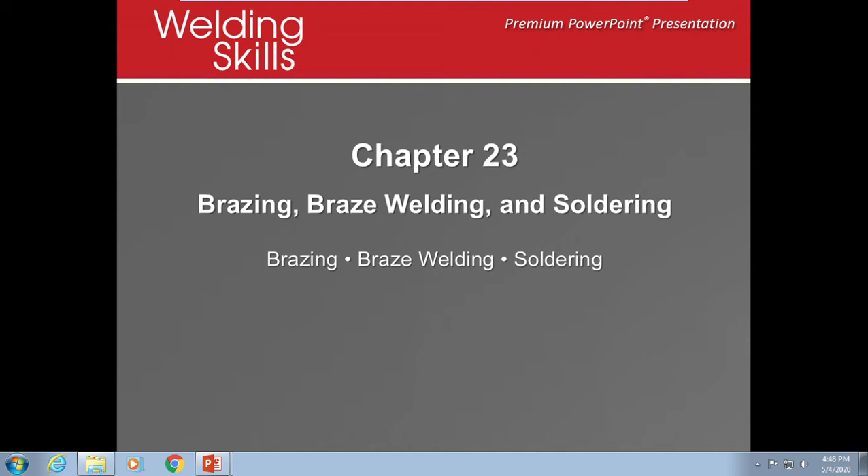When we talk about brazing, we're really talking about joining two pieces of material. But instead of melting the actual base material, we're only going to melt the filler material. Usually brazing is above 840 degrees.

The most common joints we use are a lap joint and a butt joint. The lap joint is actually a lot stronger because there's a lot more surface for it to connect. With a butt joint, whether scarfed or flat butt to butt, there's not a lot for it to stick to, so we tend to stay away from butt joints if we can. We want as much adhesion as possible.

Brazing also allows us to use dissimilar materials. It's like the glue between two pieces of paper or two pieces of wood. We're not changing anything about the material itself, only changing the filler metal.

For a good brazed joint, we need a fairly tight clearance — usually the most effective is 0.001 to 0.010, meaning it needs to be nice and tight. We don't want it overly tight, but we want to clamp it down to make sure that it works.

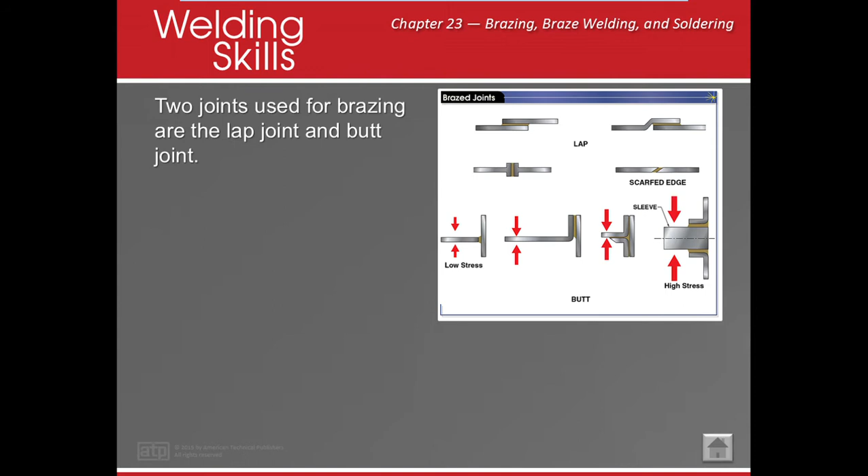For example, if I got a piece of material off the saw and it has water that sticks it together, it makes it very difficult for it to come apart. That's capillary action and surface tension working together. Now we're using that with a material that gets hot, so it spreads everywhere and sticks to each other.

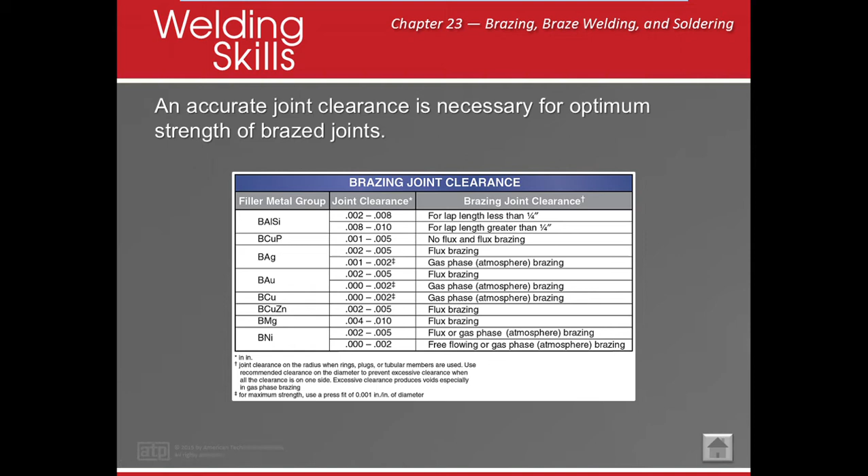Now the other thing we need is flux. Flux helps things stick together. What flux does is it kind of cleans the material to a certain effect. It's not going to get off any grease, dirt, or grime, but it's actually taking out what are called oxides and anything that could affect it.

It's also corrosive, so it gives a little bit of tooth for everything to stick on a little better. We have different types of fluxes used for different filler metals and particular base metals, so they have to match what we're trying to do.

Flux can come in many different forms — powders, pastes, liquids, or already applied onto our rods, which is how we usually do it. If we use a powder, we'll get the rod hot and dip it into the powder so it sticks on, ready for us to go. Pastes and liquid work in that same way.

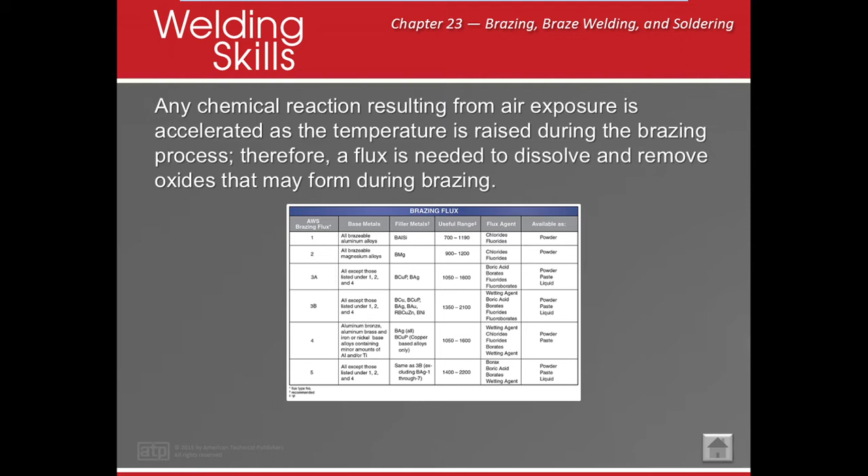So here it is, to apply a powder flux. We're going to heat it up and dip it in there.

AWS classifies materials by the B for brazing: aluminum, silicon, copper, phosphorus, silver, different precious metals — that's gold — copper, copper-zinc, nickel, magnesium. So these are all of the things.

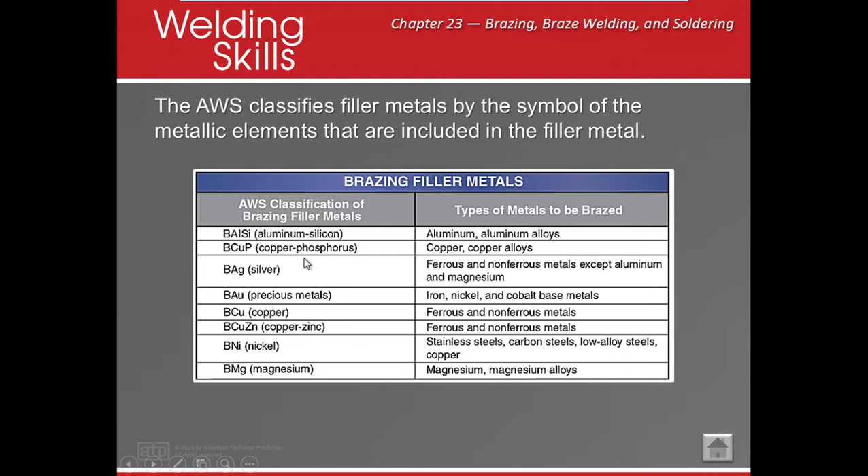Here's my brazing metal, and we want to match our filler metal with our base material, making sure we use the same type of thing.

Now, when we use the heat, we need to pay attention to how we use it. Normally, when we use a gas torch — that's usually how we braze — we're going to use an oxyacetylene welding torch, or there are many different types.

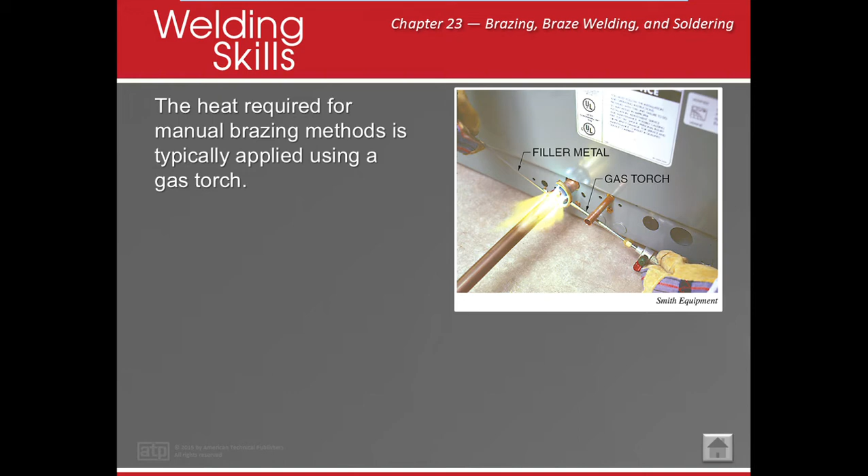We can do MAP gas or butane, but whenever we're doing that, we don't need to use the inner cone. When we braze, we're actually going to use the outer envelope, which means it's not going to get as hot, and we're not going to melt our base material — we only want to get it hot enough to melt our filler material. So here it is, the outer envelope, the outside of it. We don't want to hit the inside when we're doing that.

All right, now let's talk about different types of brazing. This gets a little crazy, but let's talk about it.

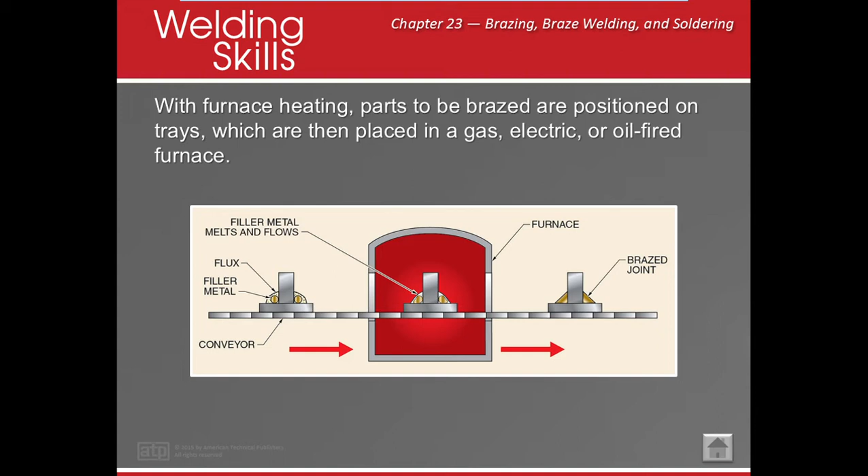So this is for production work. What they're going to do is put the assembly together, put flux on it, lay the filler metal down, clamp it all down, and then put it through a furnace. The furnace is going to melt the filler metal and melt the flux, and it's going to flow to where it needs to go. Then as the conveyor belt goes through, it starts to cool it off and solidifies into a brazed joint.

Now this one's called induction brazing. What happens is we have either an electrical coil or a water and oil coil that goes around this area to warm it up. Here they're going to put the workpiece near it so it gets warm. The only problem with this is that the heat isn't going to be the same all the way around, so we can have a little bit of an issue with some pieces not being melted fully. That's the only thing with an induction coil. A lot of induction coils are actually used to preheat piping and things like that.

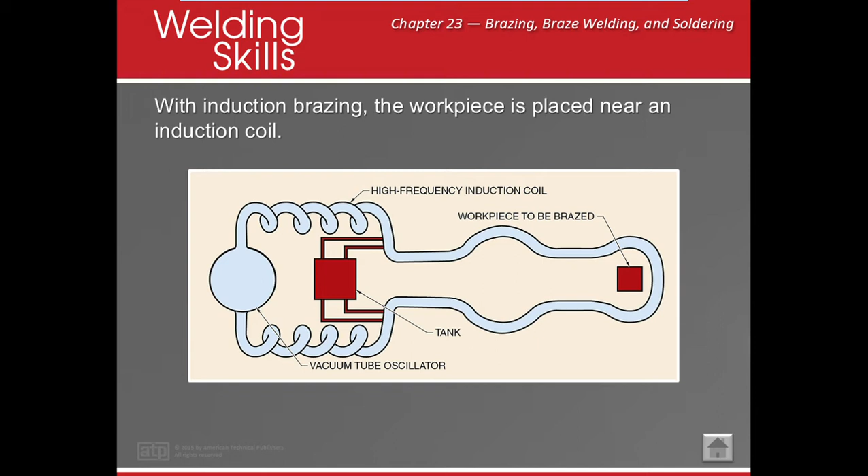All right, resistance brazing. Well, we talked about spot welding, where we take two pieces of copper and put the electricity through it. But this is different. We're going to put the electricity through it, but we're not putting enough current through here to melt our base metal. So here's our base metal, we're not going to melt that. We're only putting enough current to melt the filler metal. Now if we're doing resistance brazing, we know brazing is what? Over 840 degrees. So approximately we need a few amps here and there to make sure we don't go over that and melt our base metal.

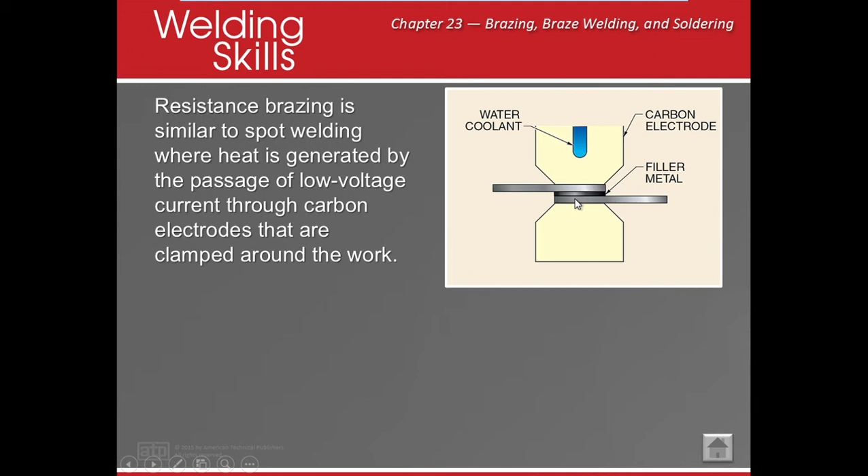All right, dip brazing. I think this is the coolest step ever. There are different ways they can do it. They get these little assemblies together, stick everything together, and then dip it into pretty much the braze material, and it's only going to stick to the areas that have been fluxed. The other way is they do a dip 1 and a dip 2, kind of like when they chrome parts - they stick it into a material where it sticks to it, and then the other one is where everything's going to stick to. Usually this is for smaller parts - they do this for electrical boards and things like that when they can do it very quickly.

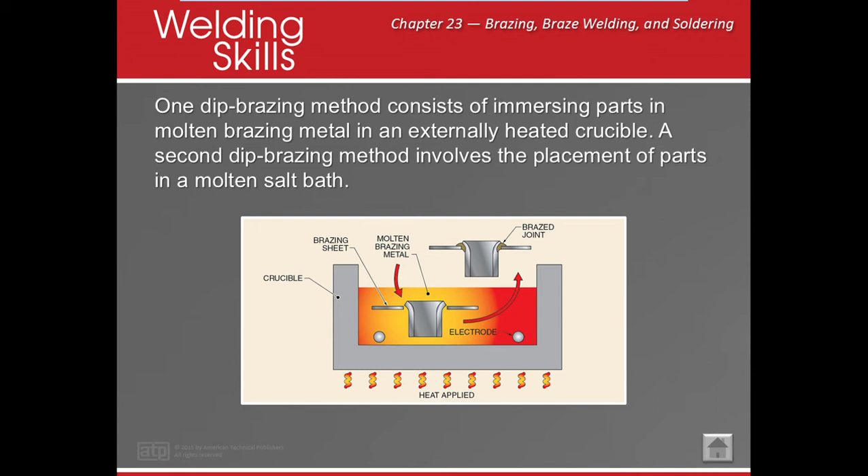All right, so what's braze welding? Let me give you the official definition so we get a good idea. Braze welding is a joining process that produces a coalescence of metals with filler metals that begin to melt at temperatures above 840 degrees. The only difference is that braze welding does not use capillary action, which means we do not have to have a tight joint clearance. And then we can also make a really pretty bead.

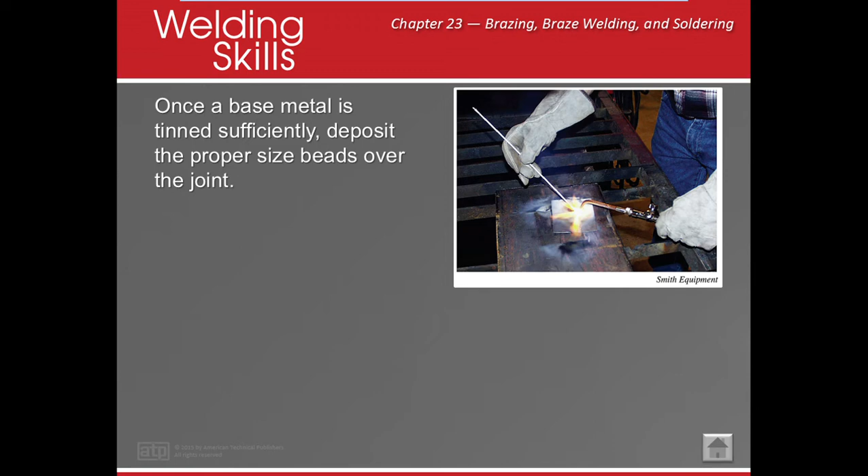Now when we do this, we need to make sure we heat our base material sufficiently and what they call 'tin it.' That means we're going to put a nice thin coating of our filler metal onto our base metal before we run that nice pretty bead.

All right, now here it is. Copper zinc metal is used. So here's all the fillers - this is for braze welding, RB. I don't know why they use RB, it should have been BR, but I think it got confusing. So here's all the different things we see: chemical composition and the tensile strength.

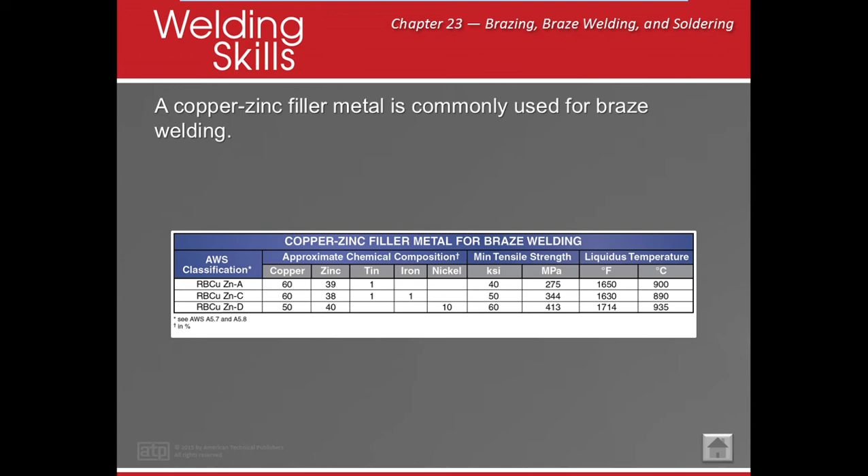Now remember, we're going to match our what? What's our number one? Matching our base metal with our filler metal, and we want it as strong or stronger than our base material. We also have to think about it when we're brazing and braze welding, that if this is subjected to high heat or a lot of stress, this might not work very well. We have to think about this - it isn't as strong as if we would weld it.

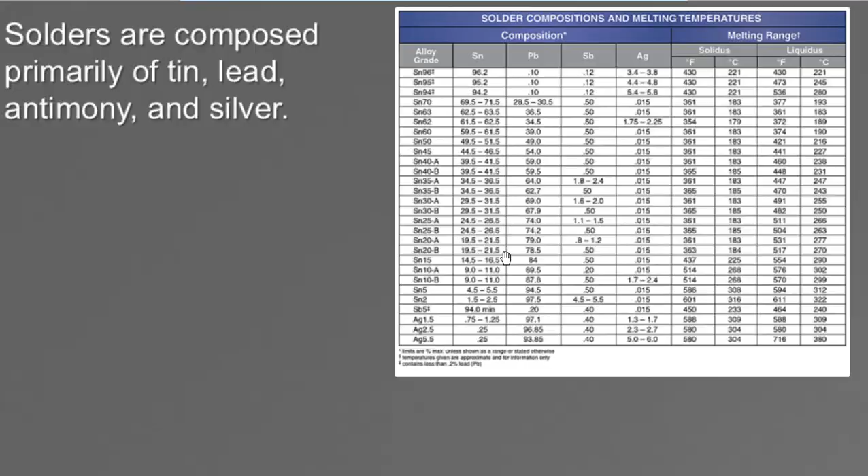All right, so let's talk about soldering. How is soldering different? Well, soldering does not melt our base metal, but it also melts at a lower temperature. Anything below 840 degrees means it's going to be soldered. We're usually using soldering because the base materials will melt very easily, so we're using compositions that will melt very low.

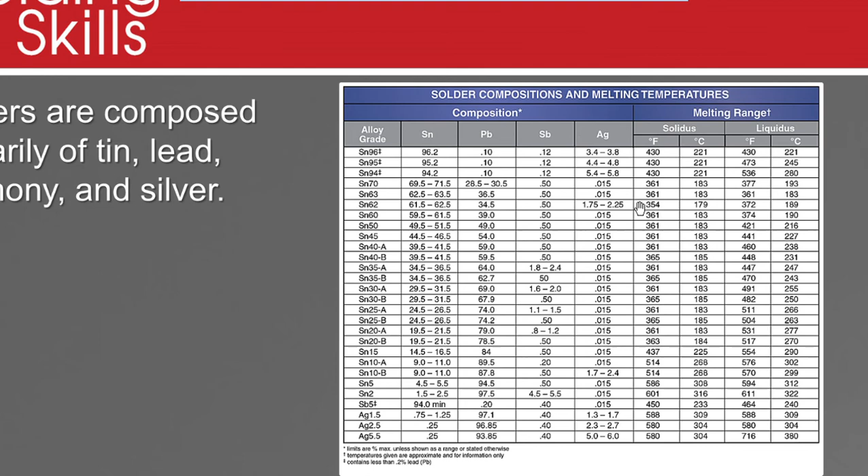So what do they mean by solidus and liquidus? Solidus means this will solidify, get solid at this degree, and it will get liquidus or liquidy at this degree. On average, solder gets about 471 degrees, give or take. So if we look at what it is, this tells us the composition of it - what's in it, and how hot or cold it gets. All right, so usually they have tin, lead, antimony, and silver.

Joint designs for soldered seams are determined by what we need the seam to do. Notice a lot of them are lap joints. They call this one the joggle, meaning it sticks out a little bit. The grooved design is where we roll it over and then solder it. The double just depends on how we're doing it.

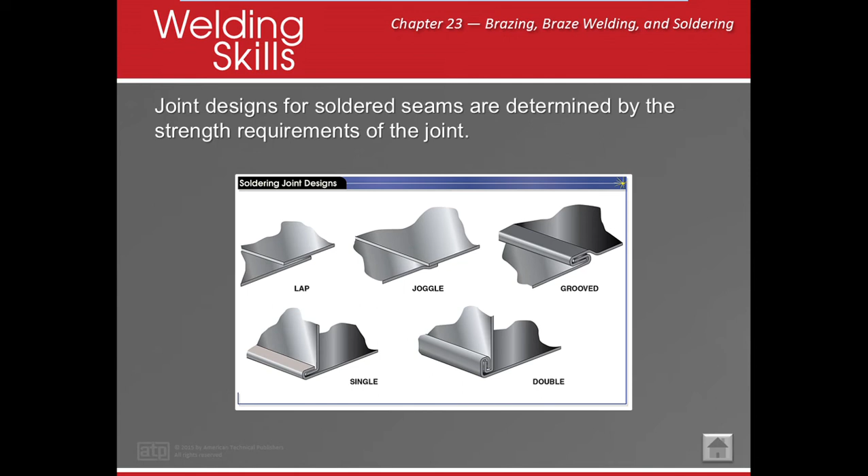We're trying to get as much strength out of this joint as possible, but remember, these materials are usually really ductile, really soft, and they can melt quite easily and are usually deformed really easily.

We can also solder with different things. I don't know if any of you have done soldering before, but you can use a soldering copper. I used to use these a lot for larger pieces. An electric soldering iron lets us put very tiny points on this, and this is more for electrical work. We can also use a propane gas torch.

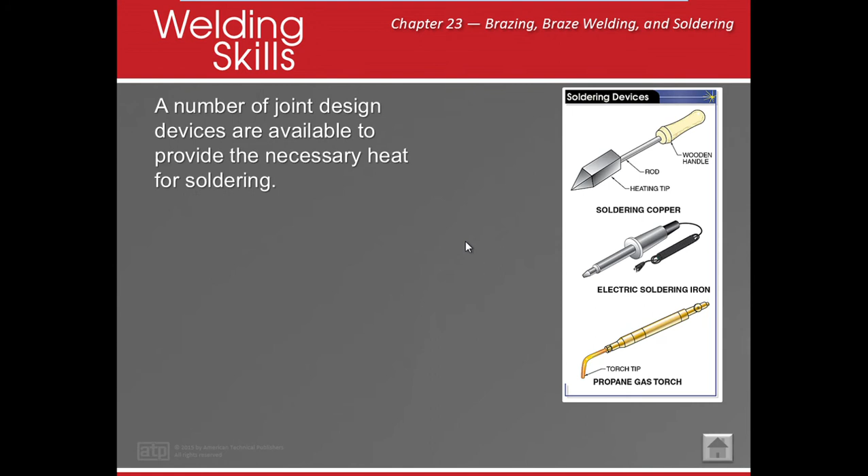Remember, we're going to silver solder copper using a gas torch. So we're soldering copper pipe. We're not brazing it, we need to solder it. Not because the copper will melt so much, but because we have better adhesion when we use silver solder.

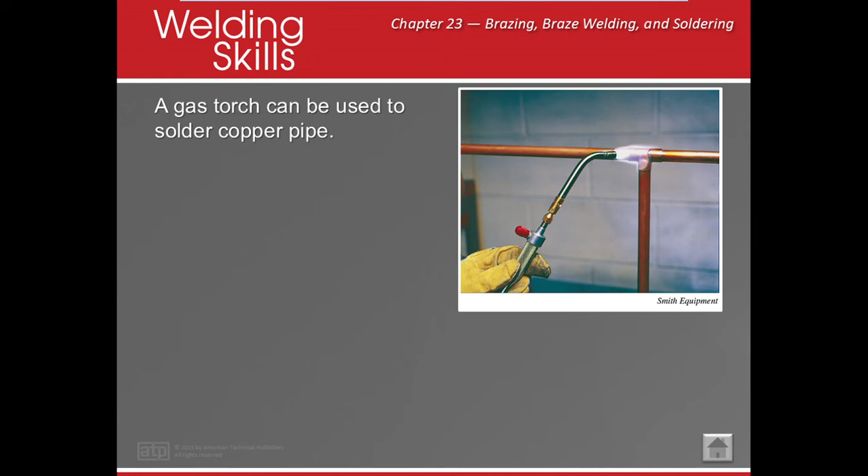There's two different techniques they talk about. One is called seam solder - it's edge to edge, and we're able to see the solder along the outside of it. They call it sweat soldering when it's going into the joint with capillary action and we're not seeing any solder visible, like when it's stuffed under something such as a lap joint.

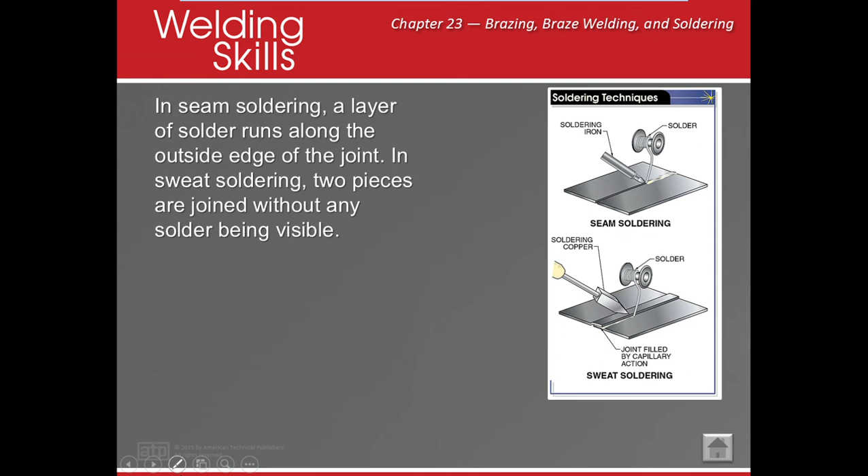We want to use the lowest effective brazing temperatures so we can minimize grain growth, warpage, and hardness reduction. When we're using brazing, there's a reason - we don't want to affect the chemical composition or how the material is reacting. Maybe we're using dissimilar materials that aren't going to melt together very well.

We use a joint design for brazing based on the adhesive qualities of the filler metal and the joint clearance. We want the smallest joint clearance as possible.

Surfaces to be brazed need to be clean - no oil, no grease, no dirt, no oxides. Otherwise, I will guarantee they will not stick, they will come apart.

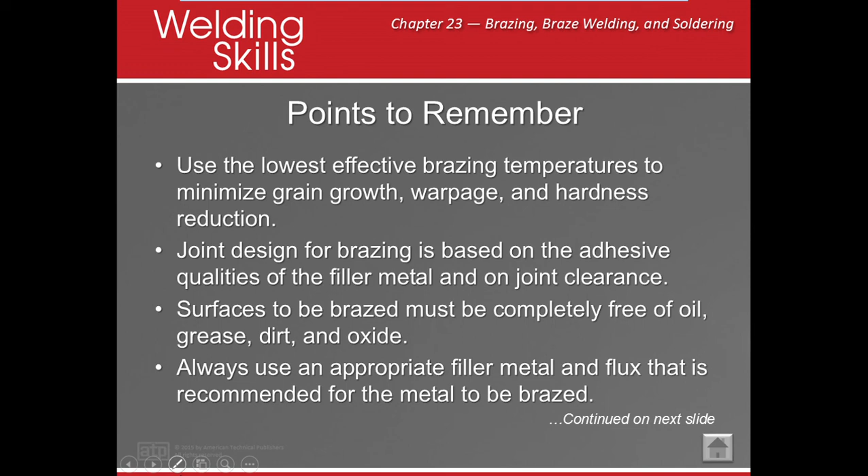We also want to use the appropriate filler metal and flux recommended for the metal to be brazed. The filler metal and the base metal to be brazed has to be looked at to make sure everything is jiving together, including the flux.

We can use oxyacetylene, we can use MAPP, but we also want to make sure we use the outer envelope of the flame. So when we braze and solder, we're using the outer envelope because it's not as hot. When we need to weld, we're going to use the inner cone.

We want to make sure we also remove all of the flux. Remember, flux is a little bit acidic, and it will actually start to corrode away your material, so we want to make sure we clean it off well.

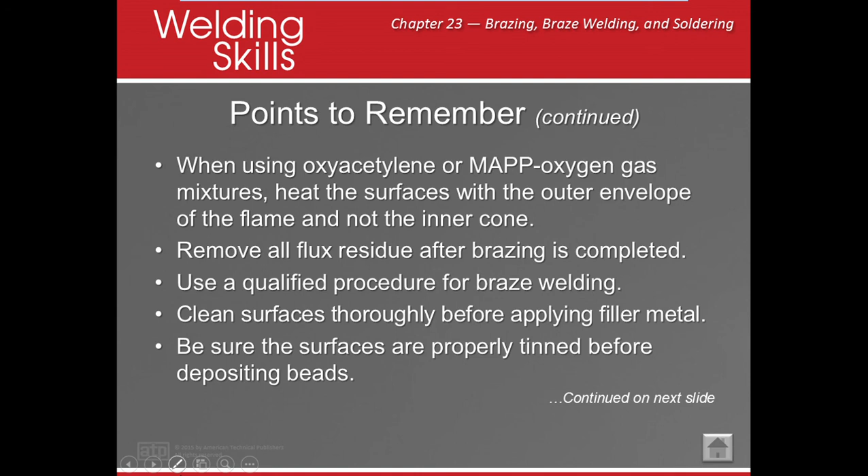We want to use a procedure for braze welding. Any type of welding process means we use a procedure. We want to make sure we clean everything before we apply filler metal. When we're doing braze welding, we want to make sure things are tinned before we put the bead on - we put a thin layer of filler metal before we put a nice bead down.

A neutral flame is used unless otherwise specified, and we want to go in a circular motion. We don't want to braze a material that's going to be subjected to high temperatures or high stresses, because either of those is just going to let all of that filler metal run out and it's not going to do its job.

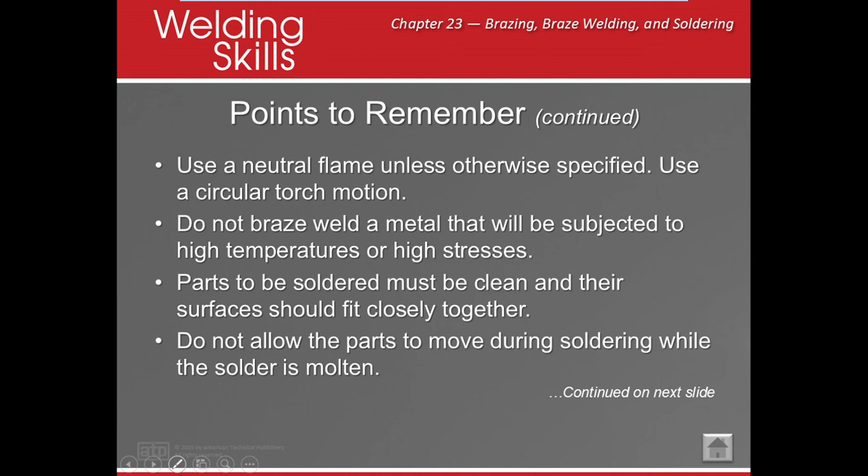When we solder, our parts need to be clean, they should be fluxed, and we need to make sure they fit closely together, because when we solder, the material melts a lot quicker and it will solidify a lot better. So we want to make sure not only do the parts not move, but we have really, really good fit.

We want to wash the soldered work with hot water to eliminate the corrosive action of the flux. And we want to make sure the soldering heat is adequate for the soldering job to be done.